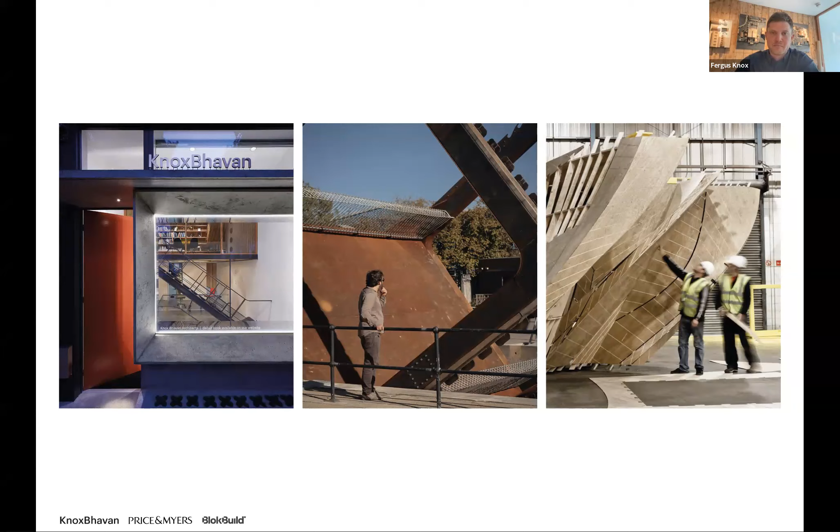So we had two items of joinery that we needed help with, and Jonathan and his team cut out the various components. These were the mezzanine on the left, which is made of plywood laminated together, which was all CNC cut, and it had a tension strap steel intersecting underneath it that Tim engineered.

And on the right is our sit-down stand-up table, which had a multiply oak top with a birch face ply chassis, which you're able to sit down and stand up at. And it all becomes one long table through the length of the office. But having worked together and knowing we could work together, we then moved on to March House.

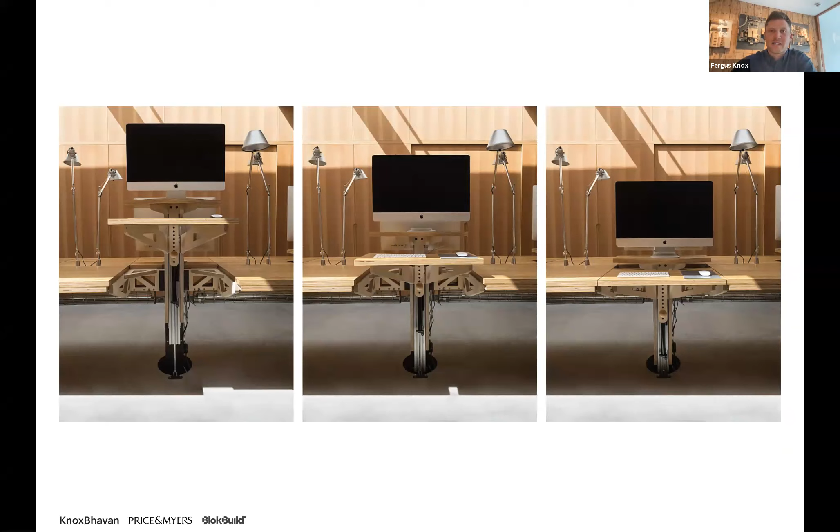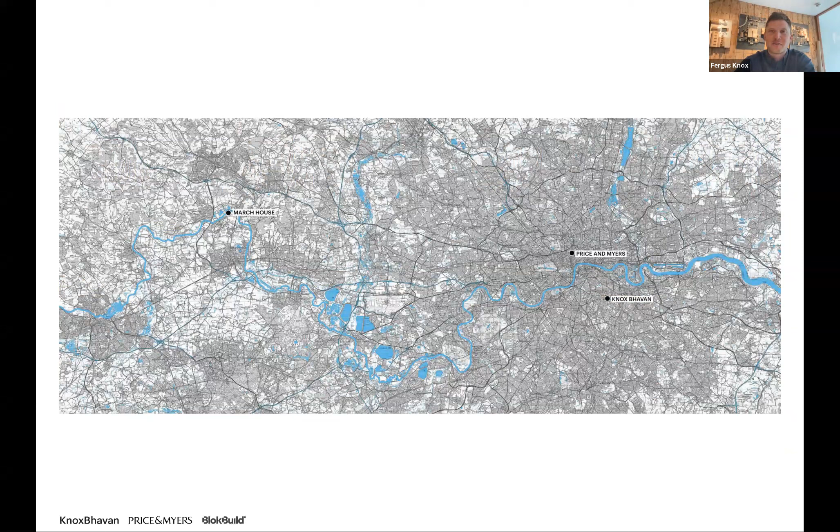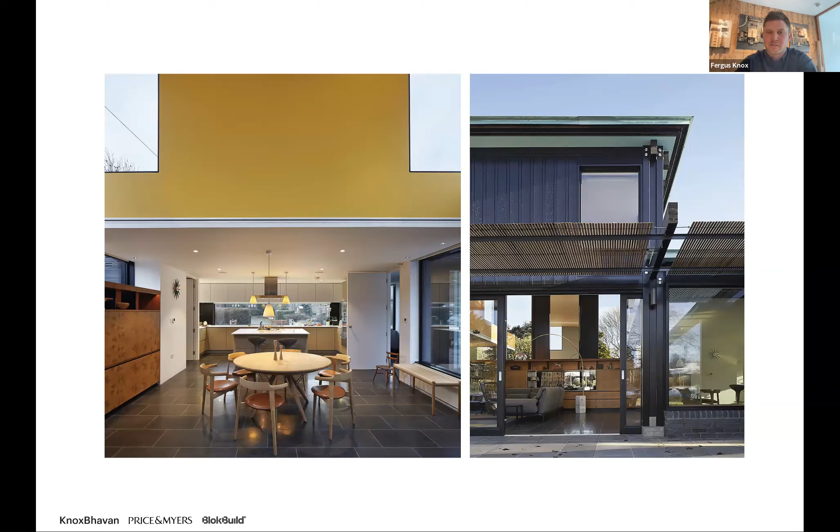So March House is on the River Thames in Cookham, to the west of London. Price & Myers and Knox Bhavan are also both in London, but Jonathan's a bit further north in Hull. Elizabeth Rose was the client, and she came to us because of a project we'd done previously in the office called Crowbrook. It has a mid-century modern feel, and that was something that she was really keen on. Elizabeth herself had an amazing collection of furniture and art, which she collated and dimensioned and gave us a really detailed specification for what she wanted in her house.

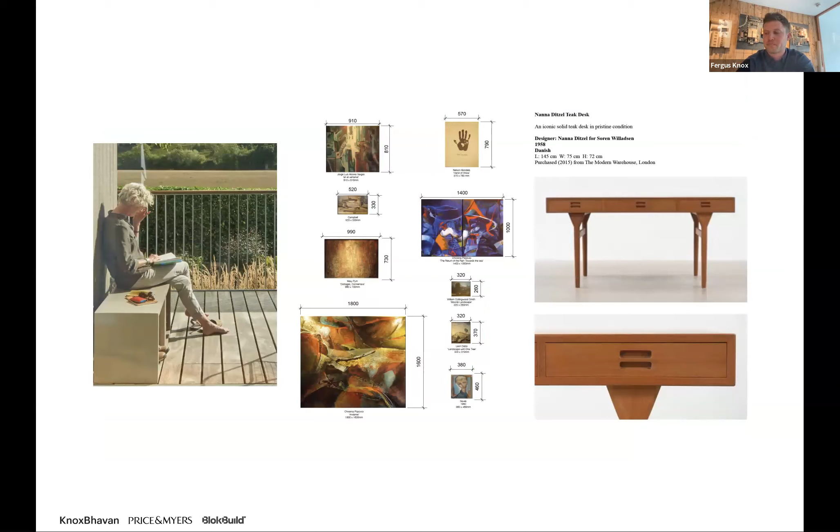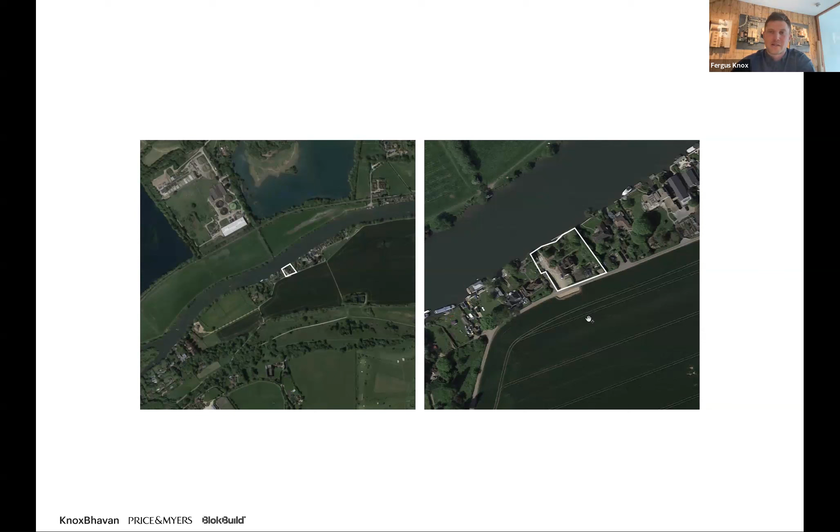She lived on the site previously for 10 years in a house which was here to the south of the River Thames. To the south of that, if you can see my mouse here, there's a hill called Winter's Hill. And then there are floodplains either side of the river. There's a sewage works, and it's close to Cookham and Marlow. The site itself here is square with an existing house in its centre, and we had to get this right of way from the local farmer to allow the vehicles to turn into site. It's a real idyllic location.

The first site visit we had when we met the client, we had dinner outside by the water, and there was a regatta going past, and it was really spectacular.

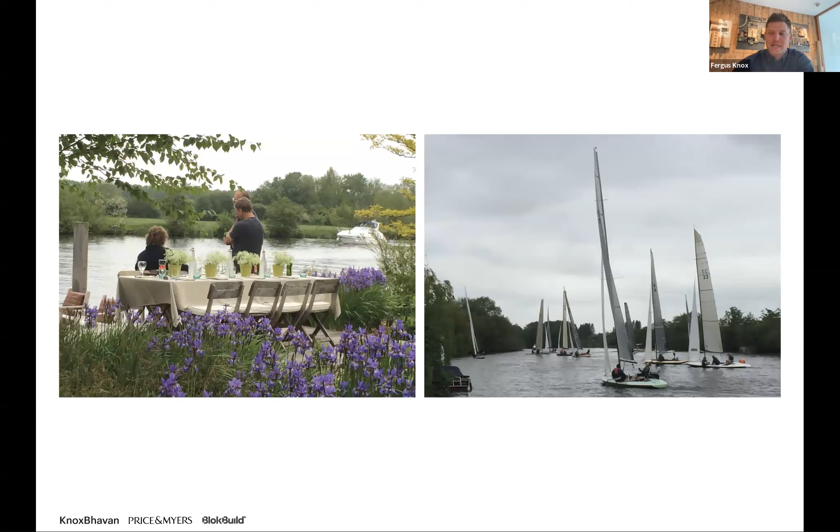But there is a real issue with the site. The flood risk is real, and it does flood, to different levels. Once a year, the ground becomes saturated to about 100 mil above ground level, but occasionally it floods much more seriously, and the client, Elizabeth, has to wear waders to access the site or use a boat.

The existing house, which Elizabeth had lived in for 10 years, was in the floodplain, so the ground floor, despite being raised, was still susceptible to flooding. On top of that, the wall construction and fabric was poorly insulated and not of good use. Elizabeth wanted a house for her family and her future needs.

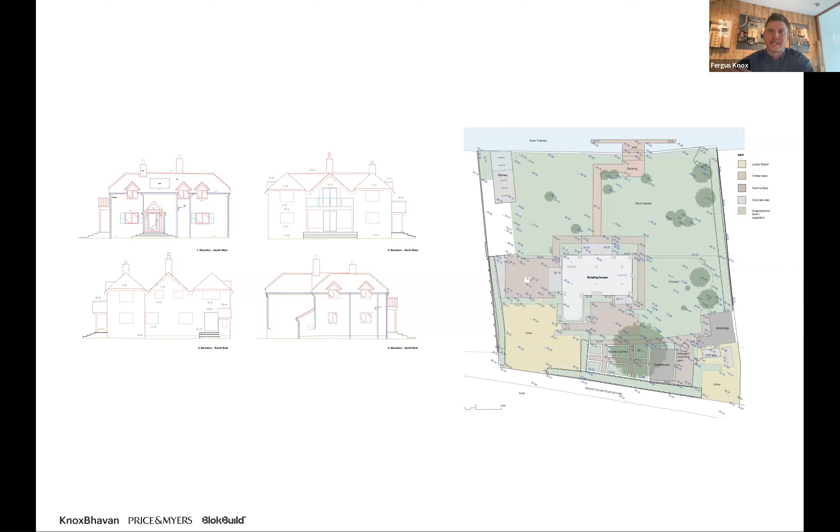And that's why she came to Knox Bhavan. She had planted her garden. Elizabeth is a fantastic gardener, and she had established on the riverside of the site an amazing garden, as well as her kitchen garden with a greenhouse, and much of the produce she grows on site, which she maintains and manages even when it's flood conditions.

So we came to the planners with a modest single-story building raised up on stilts above the flood level. You can see here, and in blue, that's the flood level line. The proposed building is 1.7 below the existing ridge height, and the bulk is far reduced, and it sits in the site very elegantly.

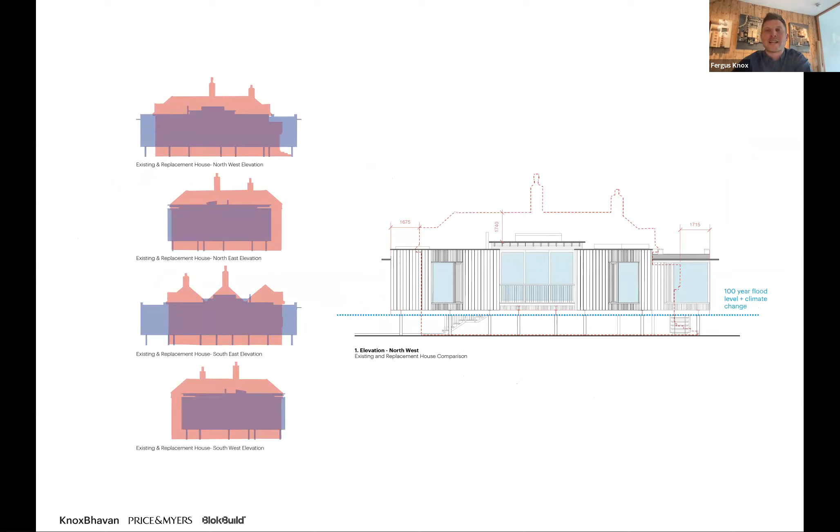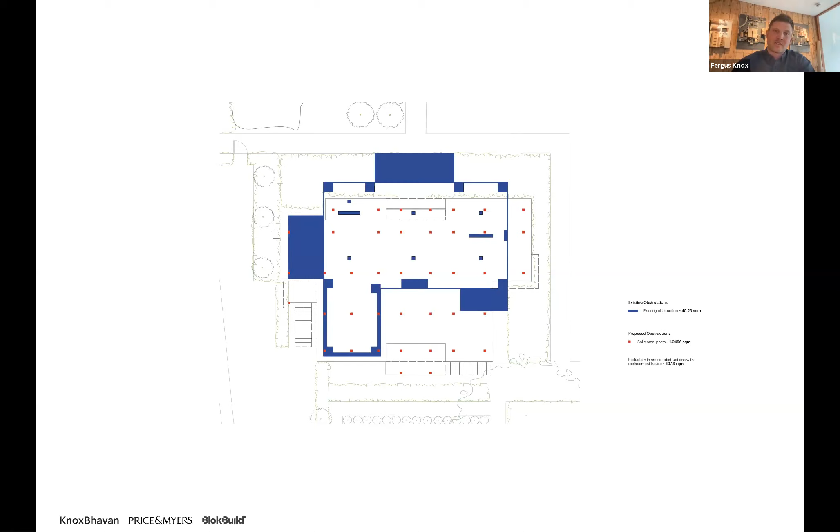But it was still a real challenge to get through planning, and it took 2 attempts, mostly because of the ground floor footprint area. We did diagrams to explain that the amount of displaced water was being reduced. Here you see the stilts actually displacing far less water than the existing building. But as a result, the plan got much tighter, and the building, I think, became better as a result.

The design had to work with the flood level. So the proposed finished floor level is the red line, the green line is the 100-year flood level, and the pink line is the flood level adapted for 35% climate change on top of that. All of the structure of the building had to be safe above that level.

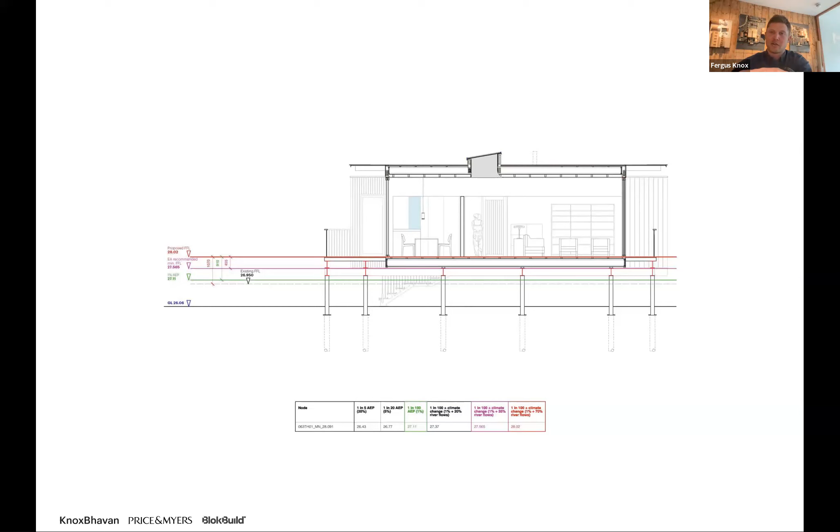The strategy for the scheme was that everything above the steel podium level, which is robust and in the water zone, is timber, and everything below that level is the kind of resilient materials. The proposed house is on the site with 2 ancillary buildings, a boathouse in purple and a new garden shed.

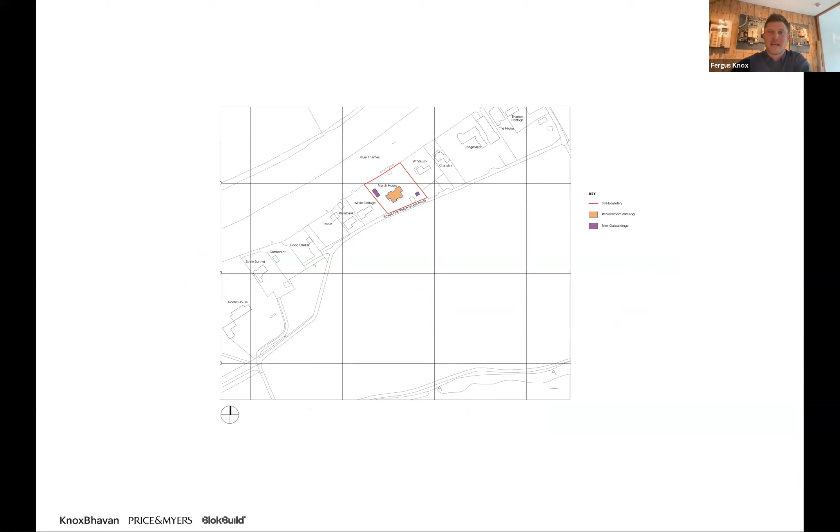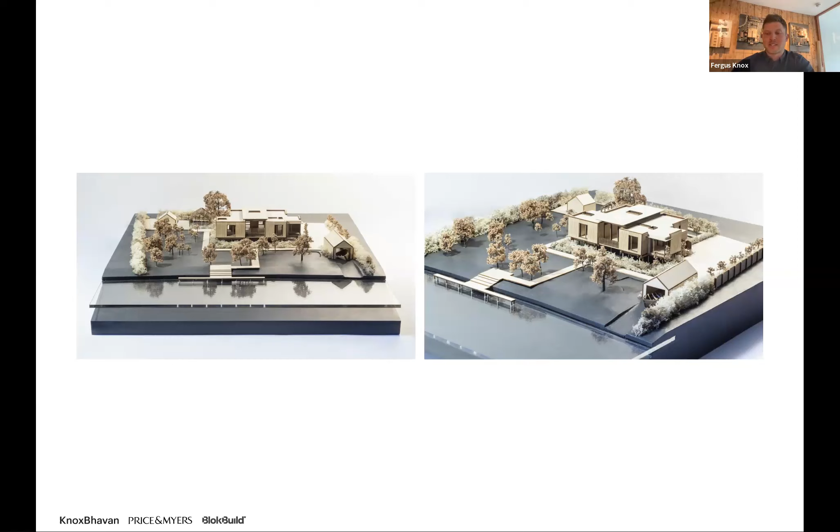Another key consideration Elizabeth had was that she wanted the house to be as sustainable as possible and well insulated, using modern methods of fabrication where applicable.

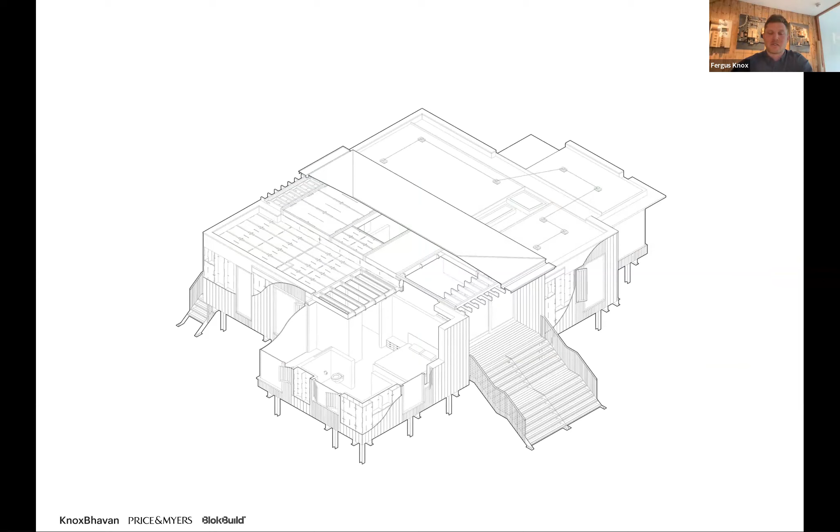The house itself uses a ground source heat pump. There's an on-site Klargester to deal with sewage, and there is also an MVHR system, which circulates air within the building, while the rest of the ventilation is done by opening shutters. I'll go into more detail about this later. High performance glazing, a green roof, and the building fabric is very highly insulated.

The materials above the steel podium level, which again we'll go into in more detail, are everything timber, to sequester as much carbon as possible and reduce its embodied carbon.

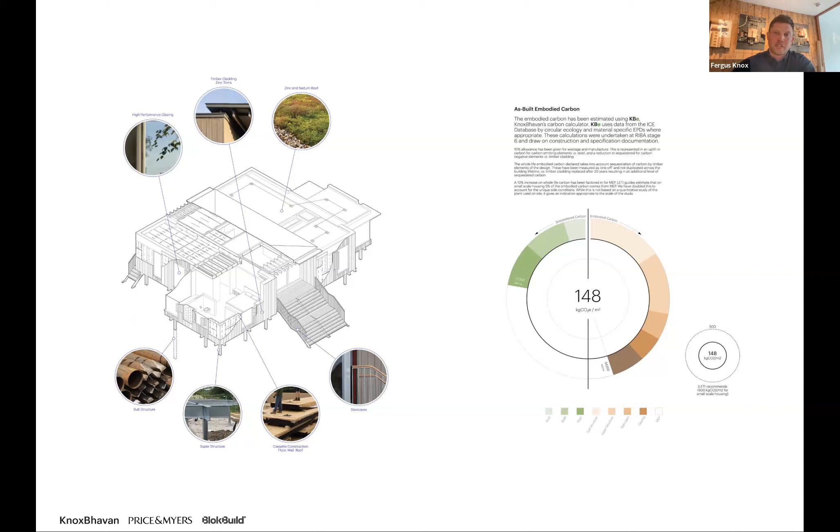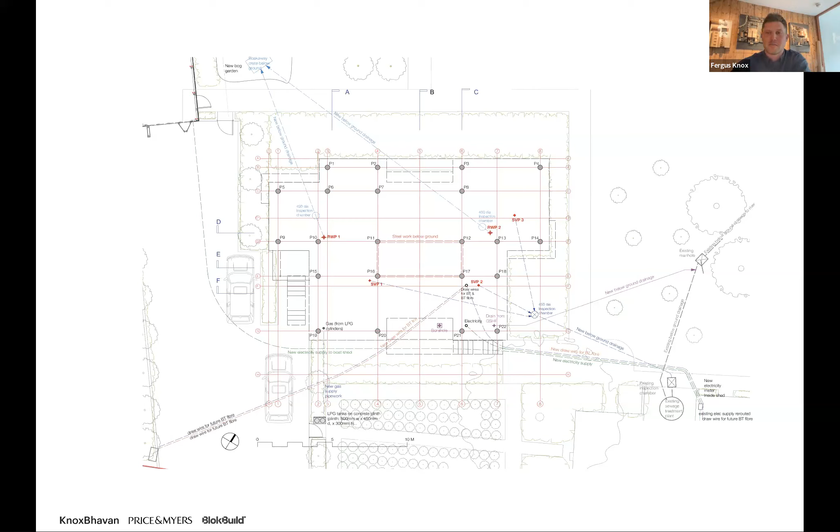So as I said before, the building is predominantly off-grid, apart from the electricity which is supplied to the road. Spade Oak Reach is a private road, so there's the electricity supply and BT. The March House doesn't have solar panels, but that's something that is going to be installed at a later date as a community supplied system where everyone chips in, a kind of collective solar panel system. Surface water drains into the Thames.

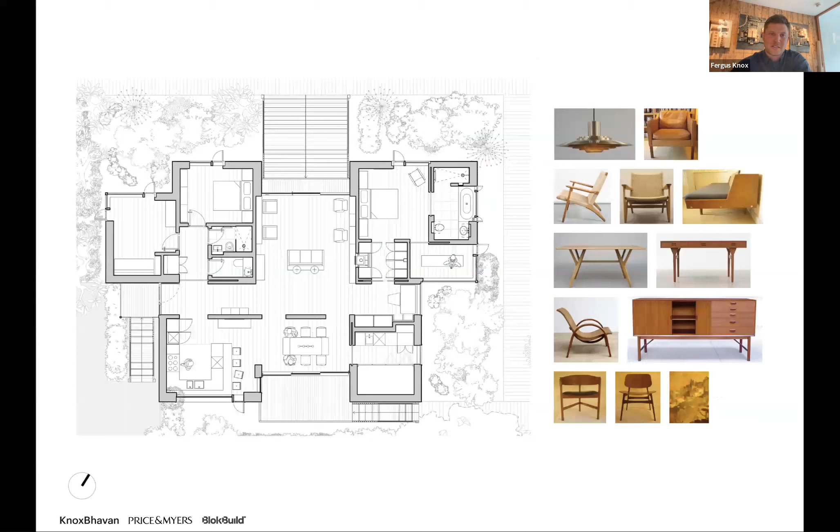So the plan is arranged around Elizabeth's extensive furniture collection, and this was a real key design factor, as well as working with her garden and the views around the building. You can see here the various bits of furniture slotted into the plan.

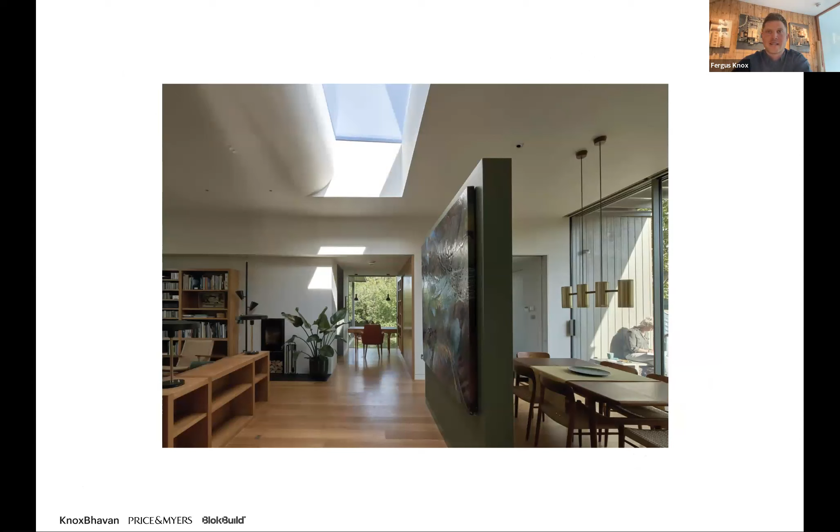So you enter the building from where you drive in, up a staircase on the left-hand side, and you're immediately greeted by a view across the whole building towards the garden, framed by Elizabeth's writing desk in front of that. The center of the plan has a spine wall which subdivides that middle space, and there's a roof light above it that floods light into the middle of the building.

After you enter, to your right is the kitchen with a view towards Winter Hill, and on your left is the guest area, but this area could also be used at a later date for a carer if required.

All of these spaces were designed about Elizabeth's furniture and her Vitsoe shelving, and these door frames were oak with veneered oak paneling between them.

The box to the north is facing the river, and that's the living space with a roof light above it. Then the dining room adjacent to the kitchen is to the south, with a terrace close nearby Elizabeth's kitchen garden, where she can come up this staircase and treat this whole space as a kind of indoor-outdoor area.

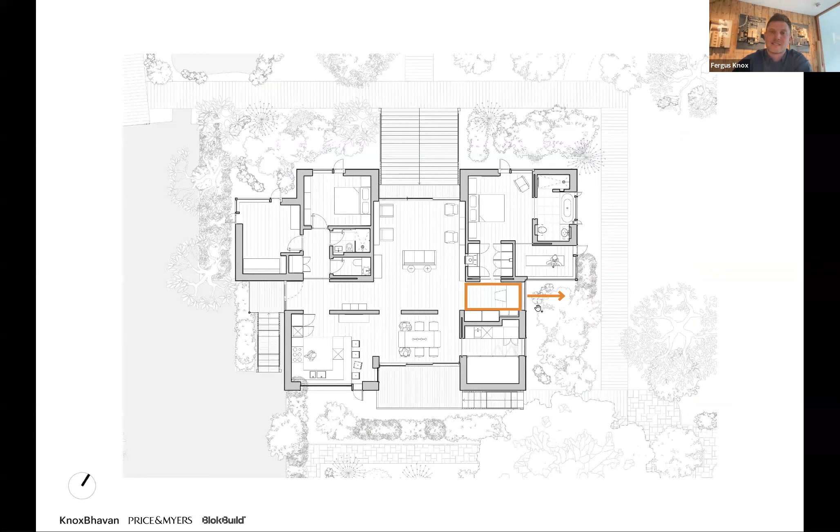So the next space is Elizabeth's study, which is maximizing any circulation space within the house. This is a desk facing a window, and to the right here is some existing joinery built into new joinery that's within the wall. You have a view towards the garden.

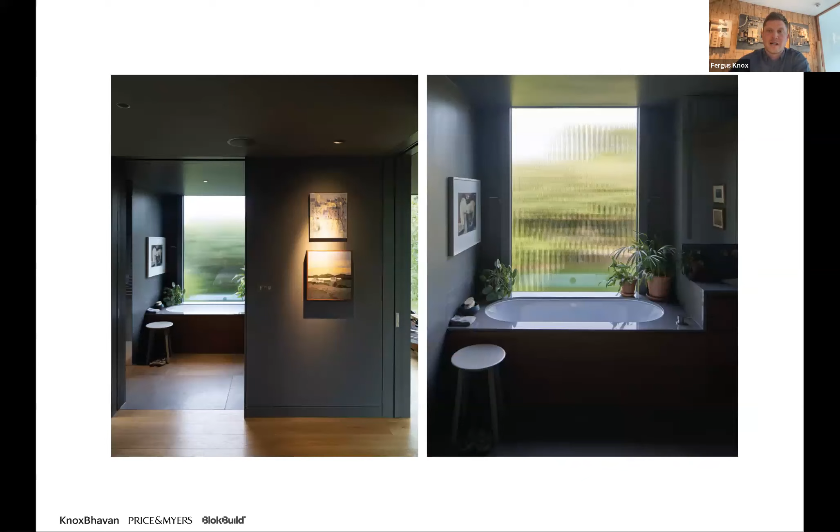Throughout the house, new joinery was built, but in her bedroom you can see in the distance that Elizabeth did have existing items of joinery that we then matched in with the new elements. So the shelving, or the drawers below her cupboards, were an existing teak unit that was then matched by the joiner with new doors above, likewise in the kitchen.

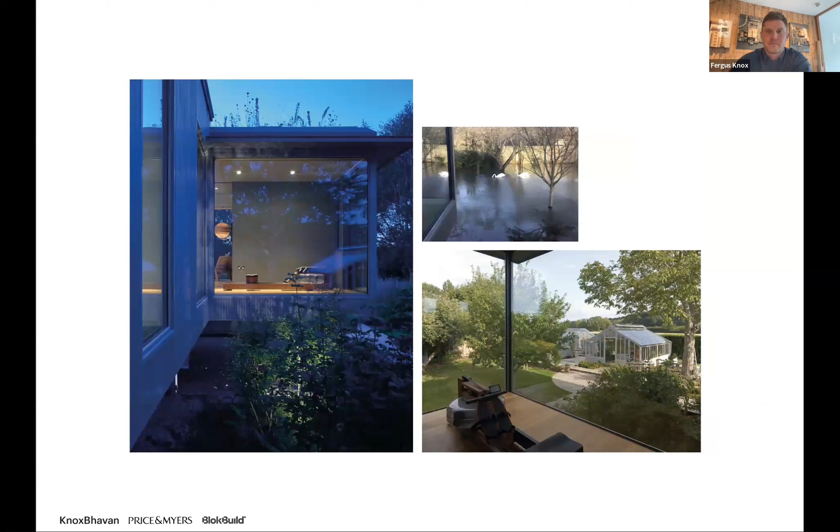And there's oak floors throughout the building. This is the yoga studio and her greenhouse beyond. So there are three main routes of access from the building.

And as I explained before, there's the staircase towards Elizabeth's kitchen garden. All of these staircases were carefully manufactured in steel to be resilient from the floodwaters, but we used Balau treads and Balau handrails, which is a tropical hardwood, very resilient if and when it gets wet.

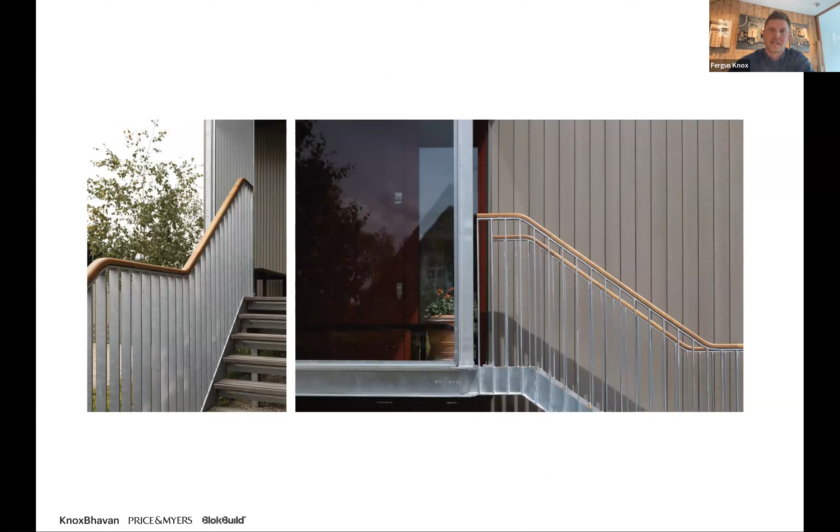Elizabeth was very keen on that handrail to be in timber, so it's soft to the touch and warm, and not cold as the steel.

These show some of the details of how we spaced that timber off the steelwork to give a shadow gap and to allow it to be ventilated. We did the same detail with the treads where they're sitting above the steel substructure.

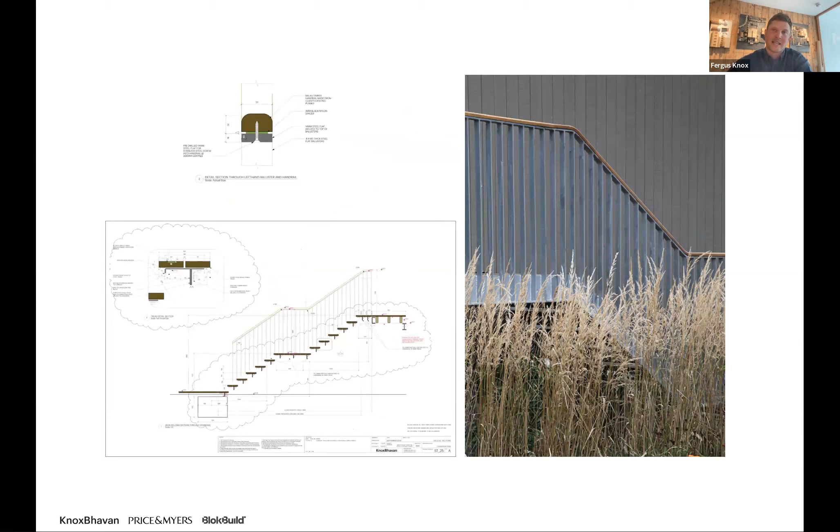So then moving on to the cladding of the building, the building is clad in larch with a coating called Centrin Chroma Coat, which was grey in appearance, and Elizabeth was keen on that to contrast with the existing silver birch trees.

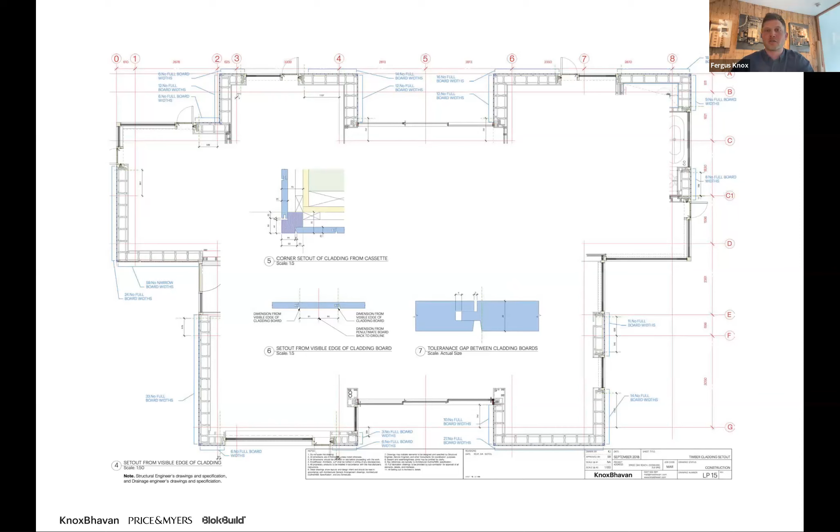There were timber corner posts, and we had larger sawn boards between the windows, and then we used narrower planed boards beneath the windows, which gave a really nice contrast between the two different areas of the elevation. The windows were custom built in Iroko timber with an Osmo stain.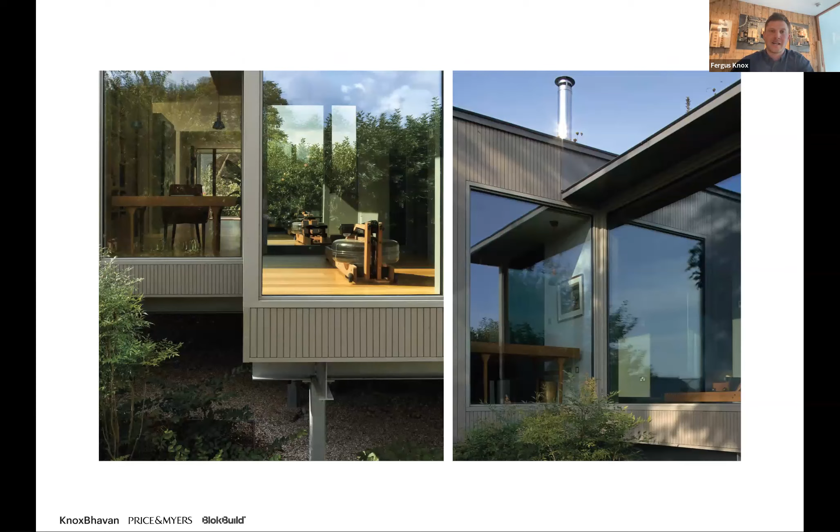You can see here on the elevation, you have the solid ventilation panel, and the floor to ceiling flush glass opening, which is lost within the ceiling and floor, with a blind box integrated into it.

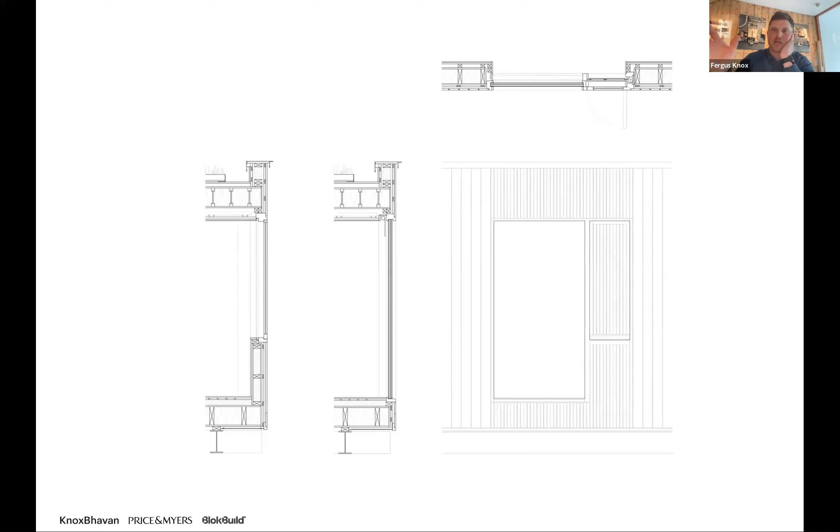On the outside, you have the plain boards and the wide boards, and the plain boards gave a bit of tolerance for the contractor to get that boarding working nicely, which you can see in these images here. On the left, you see the integrated bat box as well, which is just a slot in the cladding to allow them to roost.

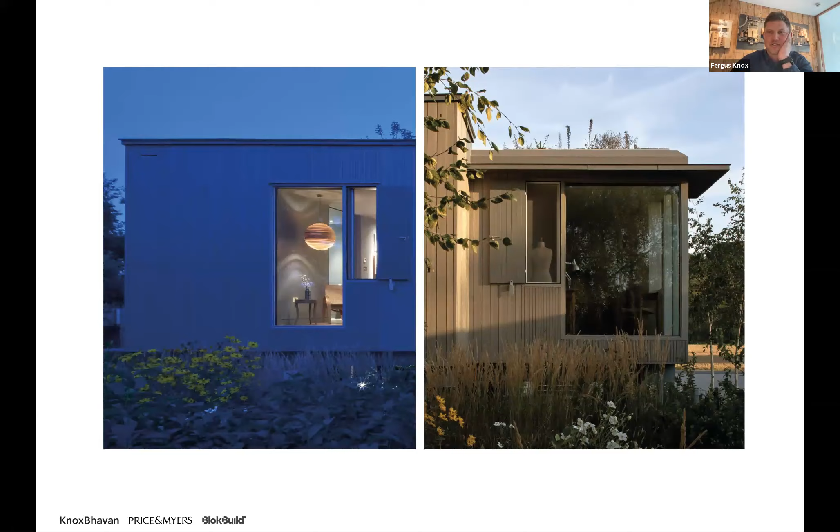So in more detail, the windows, which were custom, had the solid panel but then the hinged opening door. The hinge was on a concealed hinge with door hardware.

We sourced a roller blind fly mesh, which we then integrated into the window joinery. We also installed these shutter dogs, which are window stays effectively, with a kind of tiller rudder to stop the shutters moving in the wind.

The fly screens, because it's next to the river, are really important and they work really nicely. They're also magnetically fixed, so if it ever was to go wrong, you have access and can repair it.

What's really nice about having the solid panel fixed window and the opening solid panel is that you get this real flush finish for the windows. It looks like you're in the tree canopy, being raised about 1.8 meters above the ground.

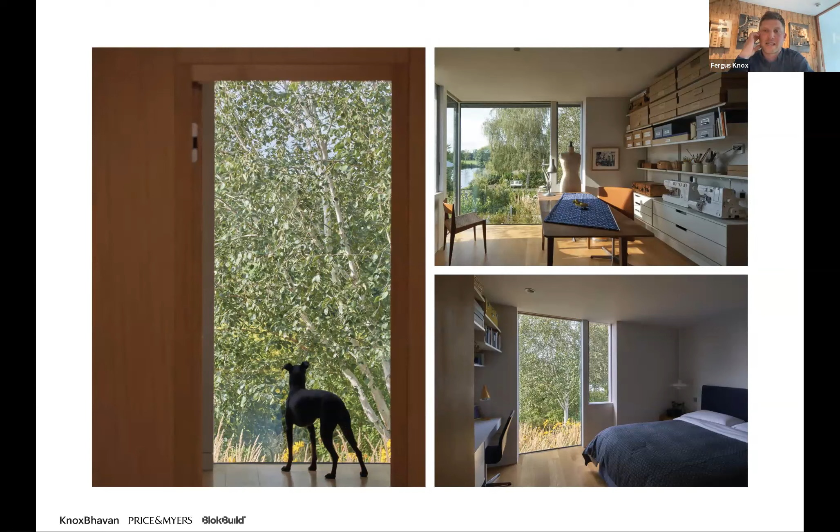There was one window - most of the windows have an overhang, but there was one window facing south, that big window in the kitchen facing Winter Hill.

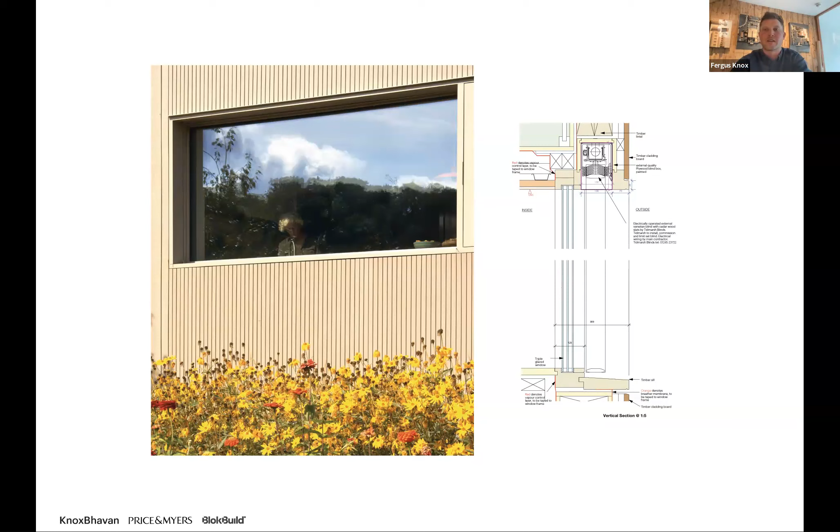For that window, we integrated an external electronic blind from Tidmarsh Blinds, which you can mechanically operate, tilting the angle of each of the louvers. That works really nicely, and it's the only place where the sun really does get into the building, and Elizabeth uses it all the time.

There are two additional buildings, which I mentioned before. There's the garden shed with the bird cage on the back to prevent birds eating some fruit trees, and the boathouse - both made of resilient materials, corrugated galvanized sheets and galvanized steel frame.

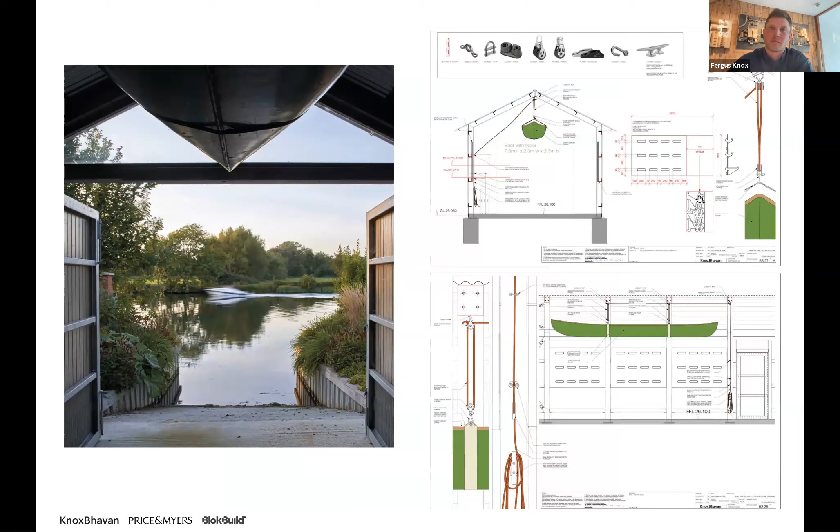The boathouse has Elizabeth's canoe slung in the top, and it has plywood panels with slotted hooks which allow Elizabeth to hang her bits of garden furniture and chairs on the wall, as well as other things.

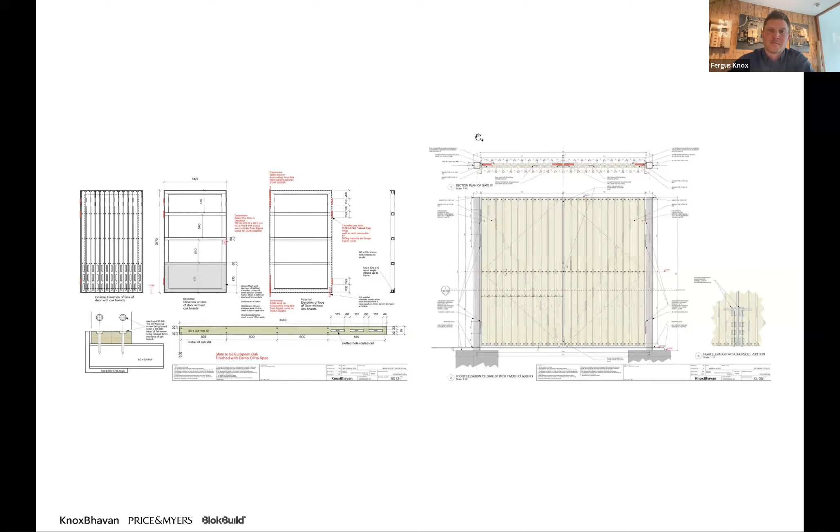The doors and the garden fences are clad in oak, a robust material, but also slotted on the boathouse and the shed to allow water to pass through. They have an Osmo finish on those as well. This is the bird cage on the garden shed, and on the left is the boathouse.

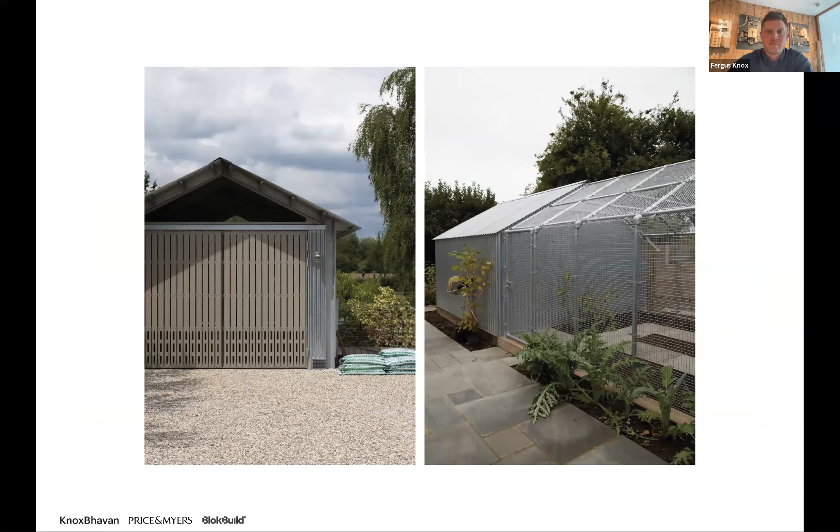Flooding was a real issue that we actually had to think of, not only for the final building, but also during the construction process - how we could minimize the amount of material stored on site, and how we could assemble the building as quickly and efficiently as possible, minimizing wet trades and other elements.

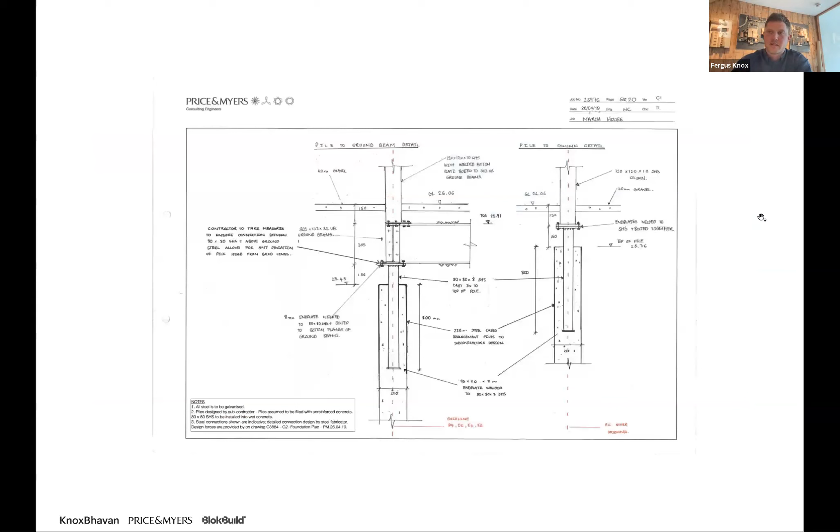Analysis - yeah, this is one of our drawings, customized drawings, showing how we started. So as Fergus said, it's largely a timber structure for the building, but it starts on the ground, obviously, with some driven steel piles.

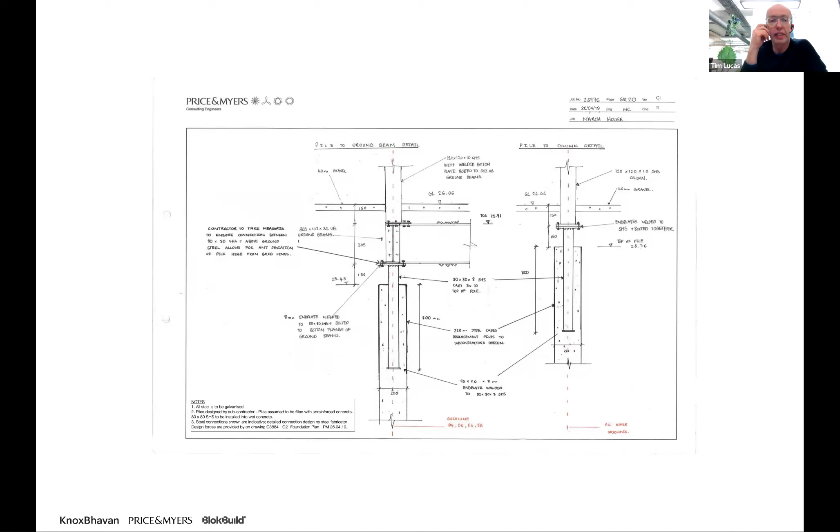Those are hollow steel tubes, 250 millimeters wide, driven down about 16 meters through the alluvium into the underlying strata. You can see here they were filled with concrete, and then this mini plunge column was installed on that, which allowed us to get ever tighter tolerances in the setting out of the steelwork, because obviously the timber above is highly precise, while the steel is within normal steel tolerances.

So you actually see the edge of the steelwork as the profile of the I-beam, and you can see in the middle there's a ground beam, rectangular ground beam foundation. So effectively, we have a Vierendeel frame that forms the structure of the building with no cross bracing to get in the way of the floodwater. So the idea is to leave the floodwater and any debris as unimpeded as possible underneath the building.

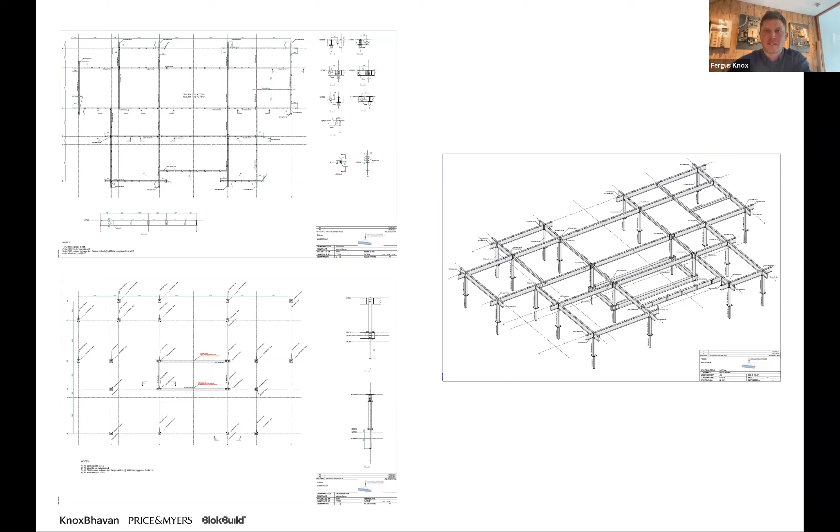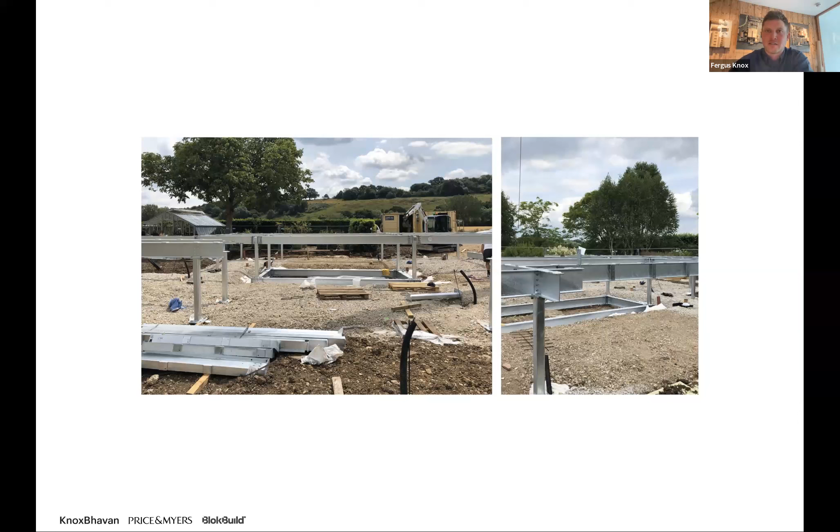Where we connected the steel onto the timber, we put these steel plates to space off the timber from the steelwork so, if it ever did get wet, it's ventilated in that zone. Yeah, so there's softwood joists on their side on top of the timber, so it's a 100 mil wide flange. And then, as Fergus says, it's bolted off, and that allows us to move from the steelwork into the timber by bolting the timber on top of the top flange.

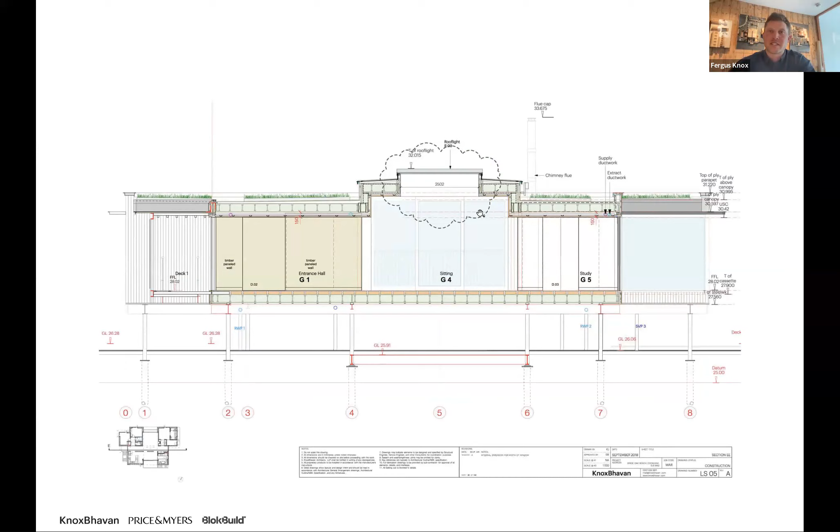Sorry, Tim. The actual timber box on top of the steelwork is incredibly simple. It is just this insulated box that sits above that and wraps in a continuous layer all the way around the building. And then Tim, you can show the... Yeah, here's the detail of the interface between the steel table and effectively the floor slab of the building, which is prefabricated in timber as a large cassette.

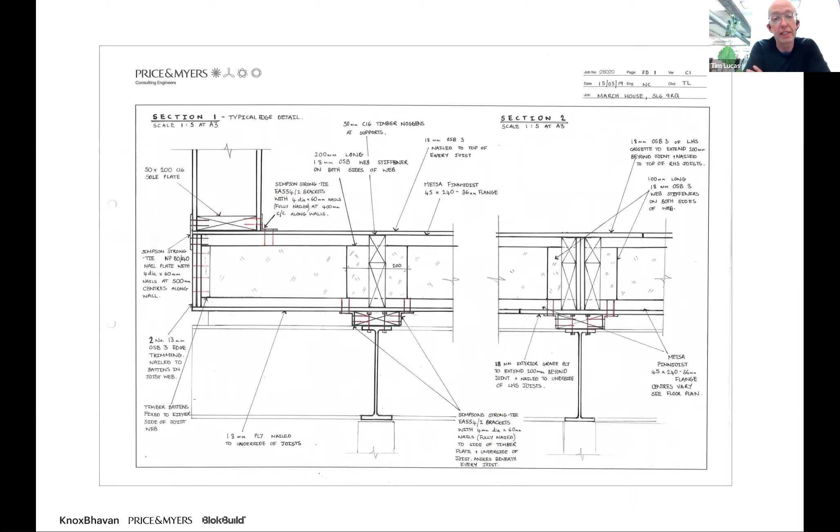So they have Finnjoists which span the full distance. They're about 6 or 7 meters long. They were quite large, with a plywood soffit panel and an OSB top base. That is filled with insulation, and it has softwood noggins as well, and that forms effectively a large timber table. And then on the left you can see the bottom of the BlokBuild panel, which is a hollow OSB box. What we've been doing recently, and this is one of the earlier projects where we started, was helping BlokBuild develop their system to be based entirely on OSB, so with no timber sections in the cassette.

This is a typical cassette. Jonathan might want to come in and explain what it is. Yeah, so we digitally manufacture these using CNC machines. So OSB sheet material with the tops and bottoms and the side plates all screwed together, and you can see that central cutout has got a fin. They're all individually referenced in terms of installation sequence, and then they're assembled. With the tops off, we fill them with insulation, then screw them shut.

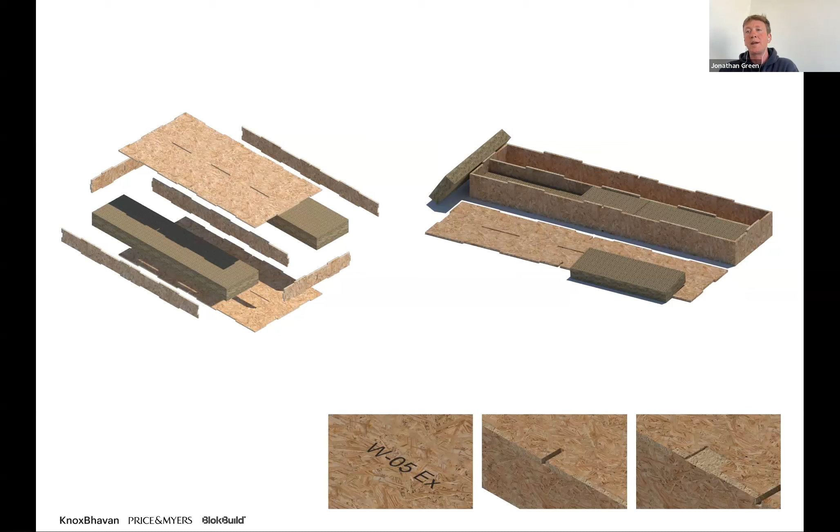We've got a peg detail, which is to fix one cassette to the next cassette, and then a routed nail plate position. And those nail plates are, I think, a galvanized plate that you fix on. Through this project, the nail plates weren't rebated at the time, so that had a few issues with the external battening, just in terms of having to pack it. So the iterative design has meant that we now rebate those plates, and that helps with the quality management processes as well. So we know that we've got all the nail plates that we need, and they're all in the rebated positions.

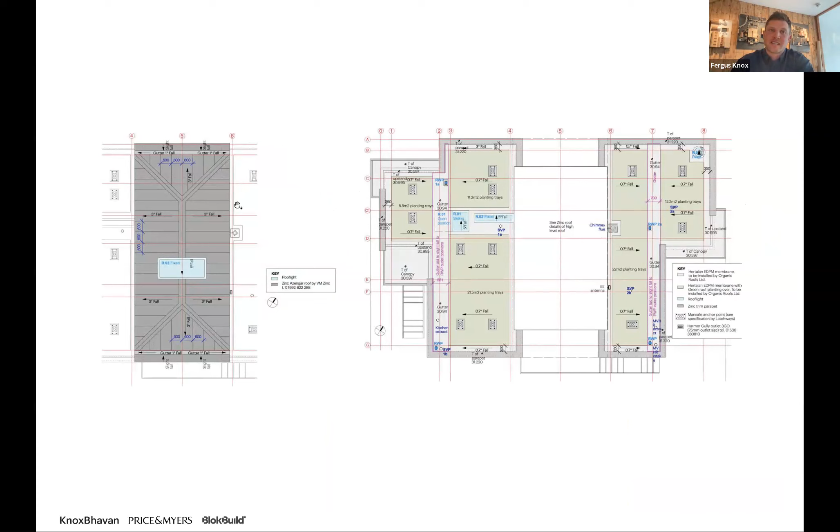So when we started designing the building, we hadn't actually decided that we were going to use Jonathan's system, and we were keeping our options open. And as the building had a flat roof, water ingress was a concern. So the two sides of the building, which are planted green roofs, were laid on a fall, but they were fully ventilated with the zinc central roof in the middle.

And you can see here that continuous ventilated layer underneath that top surface with a liquid applied membrane with the green roofing above and the zinc roof in the center. There's the green zone, which kind of ended up being Jonathan's system. And then below that is a clear void for the MVHR ductwork and servicing, and then the finished plywood layer

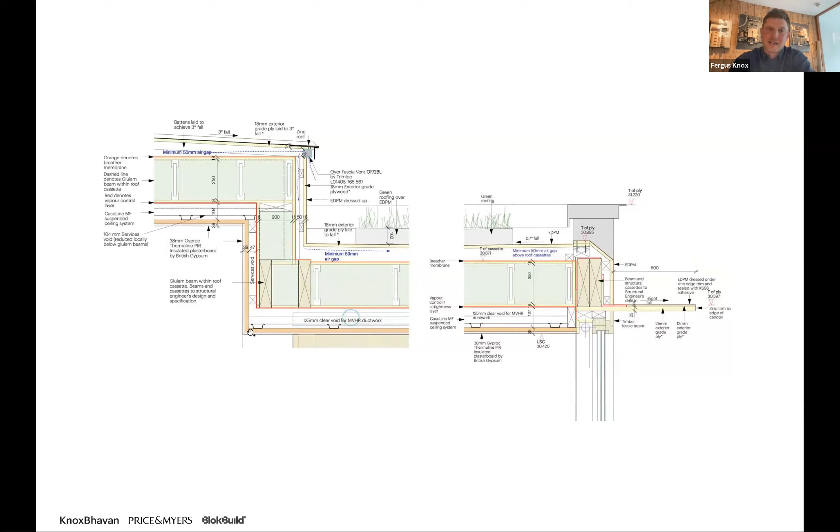underneath. And you can see where it works really nicely with this building, how you have that continuous insulation layer with the ventilated zone around the outside between the external roof finish and the cladding finish. And that also allowed us to vary the internal finishes from the bathroom to the kitchen to other areas. And we use sand above the cassette to dissipate the heat and allow for the underfloor heating.

Yes, this is one of our sketches showing the ties and layout of the floor cassettes. So they're generally done in two spans, so from where the mouse is, all the way north-south on the drawing, and then placed east-west, about the width of a lorry bed, so about 2.5 meters wide.

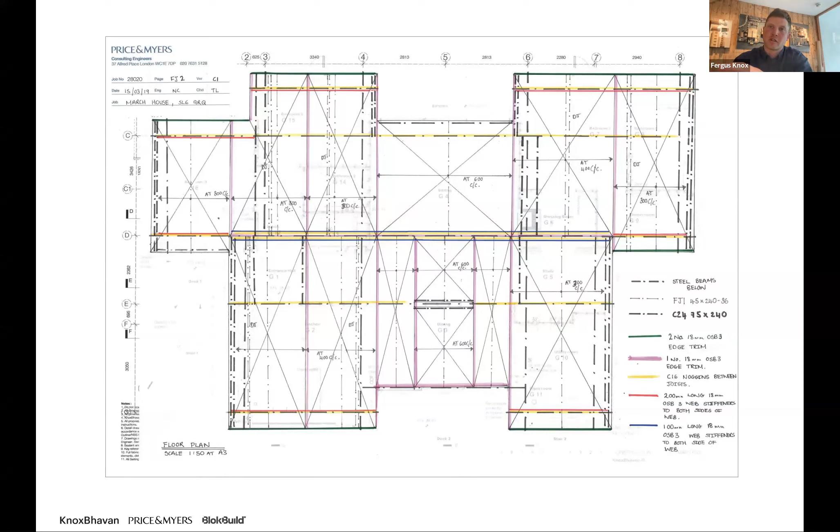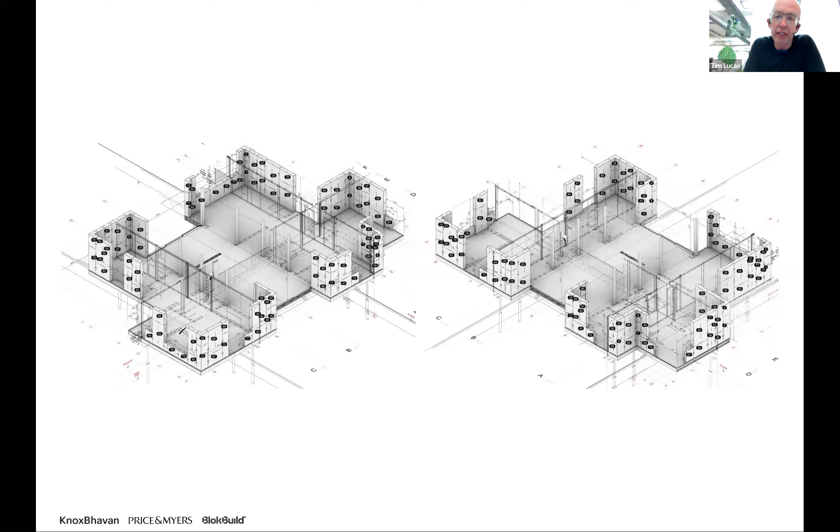I was just going to say for the house, the strategy was that the floor and roof cassettes were made by Jonathan, but not loyal to Jonathan's system. They were much larger, but the wall cassettes would use Jonathan's nested computer cut. Yeah, so perhaps Jonathan can talk us through the design process with these, but obviously they're staggered in 2 layers because a sheet of plywood's only 2.4 meters high. Yeah, but then the larger panels.

This shows the floor panels that we were making up, and these were made using the FJI joists and softwood noggins and then insulated. But we've got a limited size in the factory, and we don't have the butterfly tables that larger manufacturing facilities have, which is why we predominantly use 600 by 1200 cassette sizes.

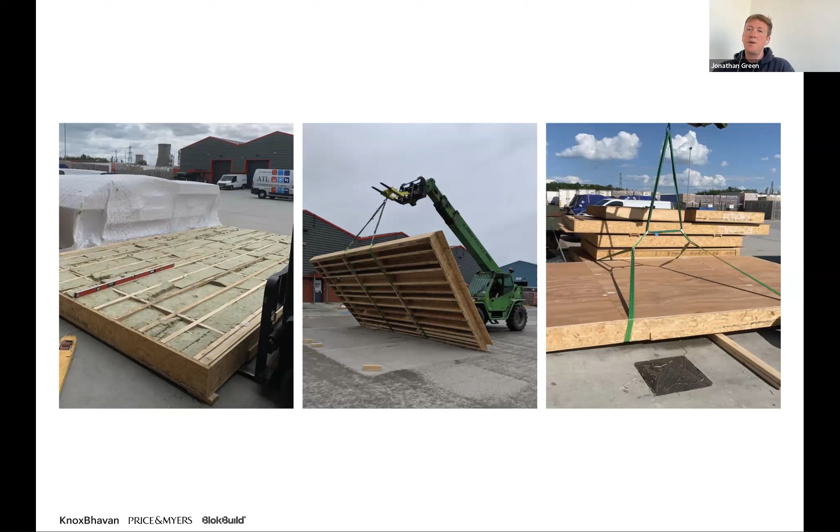So we made these larger floor cassettes, and I think through the process of making them for the floor, we went back to Price & Myers, Tim's team, and reduced the size of the roof cassettes. The wall cassettes were going to be our standard, and it was based around access. You can see there the floor cassettes arriving, not much room to get those down. And then the wall cassettes are much more manhandleable, so 1200 by 600 maximum size.

You can see these being craned into position off the lorry, which is a really quick way of doing it, already wrapped in the membrane. The membrane was factory applied, taped at the sides, and then as we were installing them onto the steel, we used tape to tape the joints, just making sure all of that was in place and hadn't been damaged.

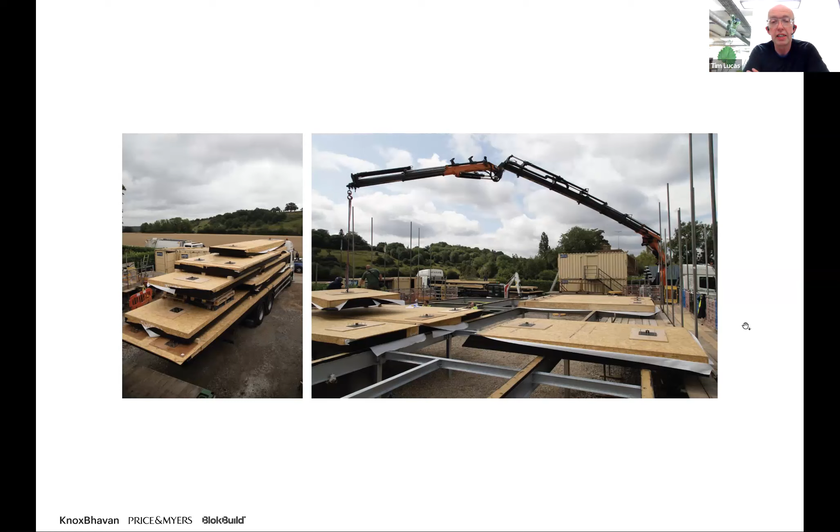I think what you can also see in this image is the timber sole plate, which the cassettes were then connected onto. And also the lifting plates, which were screwed into the top of the FJI joists to allow us to lift them up and place them directly side by side. Yeah, there's the straps on the lifting plates.

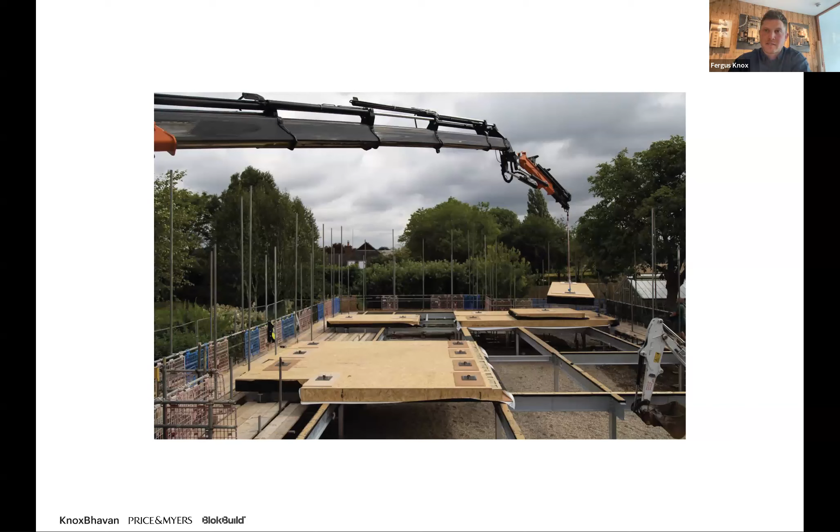And there was a connection panel left off to allow you to screw and bolt each of these individual panels together. And then that was installed once everything was positioned on site. And the top skin was left over long, as I remember, and as it came down, it connected with that connection plate that had been left off and then fixed through.

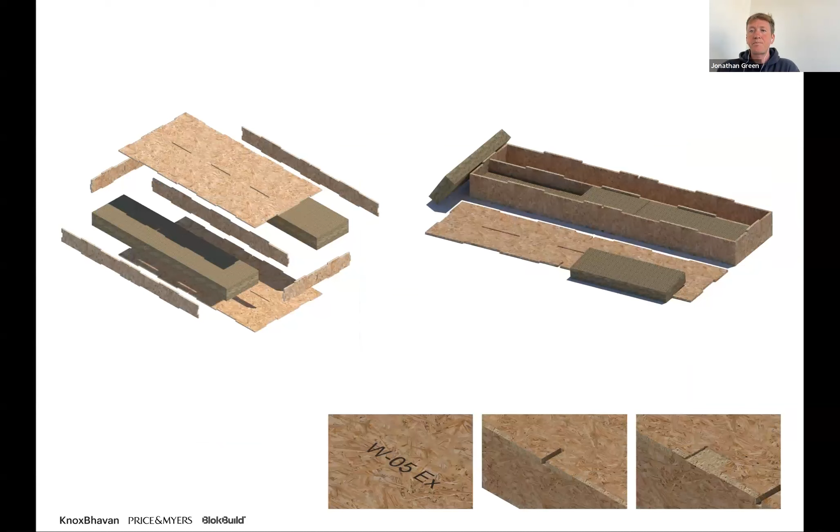And you've spoken about that, but the ground slab cassettes weren't, as we said before, traditionally Jonathan's system. But for the actual digital cassette, there's a design process where we have the architectural designs and 3D BIM model, which is then sent as a coordination fabrication model to Jonathan and his team, and also Price & Myers.

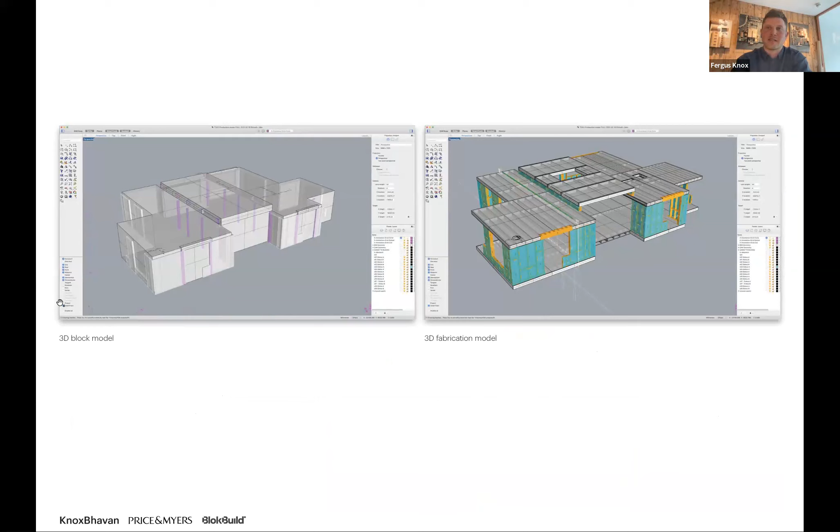And then this is just frozen. Sorry, here. And there's a crude block model, which is then to be inhabited with the cassettes and the script. So on the left, you see the zones, and then on the right, you have the fabrication model.

Yeah, so we go through a process of defining the structural layout of all of the OSB cassettes, and then that markup effectively is done in 3D on the Rhino model. And then the actual fabrication model is run through another script that produces all the parts, which, as you can see on the right-hand image, feeds information to the CNC cutter.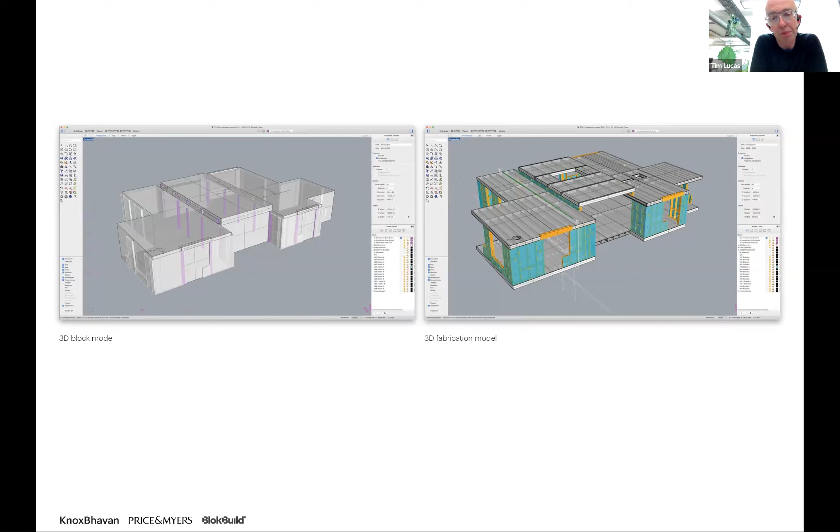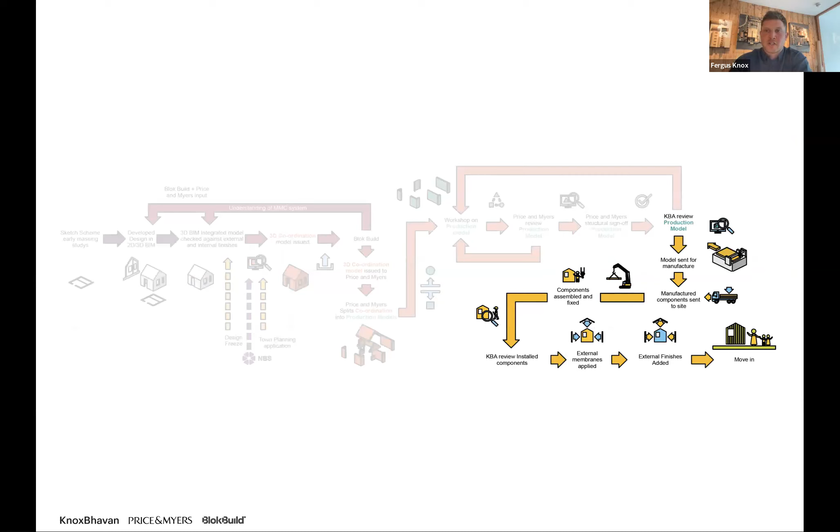So the structural openings are checked, the position of various cassettes, to also double check against services and openings. And then finally, once Jonathan's given the production model, it's reviewed by us and given the okay, it's then put into manufacture.

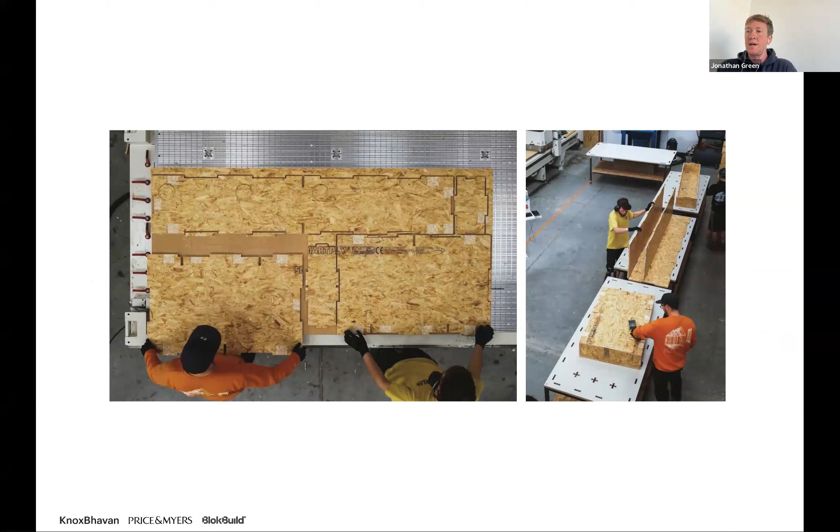You can see the way that we do it. So we machine it on a flatbed CNC, 3-axis, and then it's assembled using those parts that are cut out. There's very minimal waste. A sheet produces 50% of a cassette, so 2 sheets is a full cassette. And yeah, they go together pretty quickly on site using nail plates and pegs.

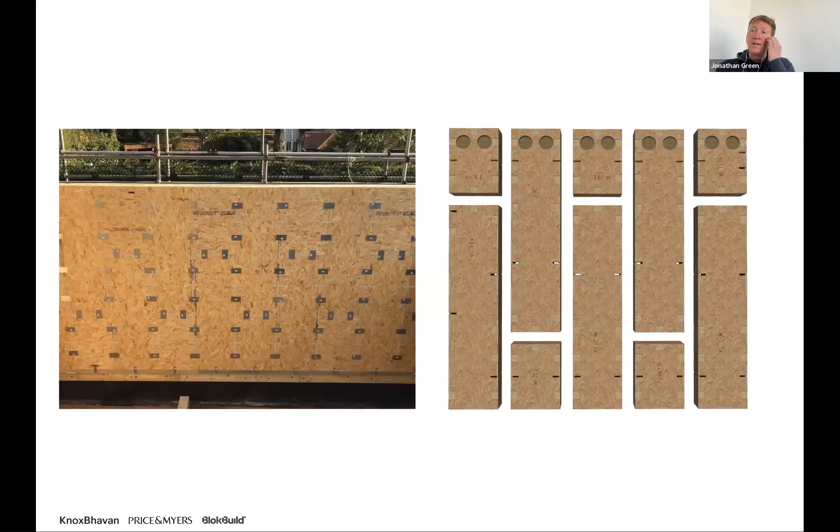So the pegs are a plywood peg that they just knock in using a mallet, and then the nail plates are rebated or routed out on the joint lines of the position that they need to be in. They actually weren't on this project, so as part of the design process, we've now started routing those out.

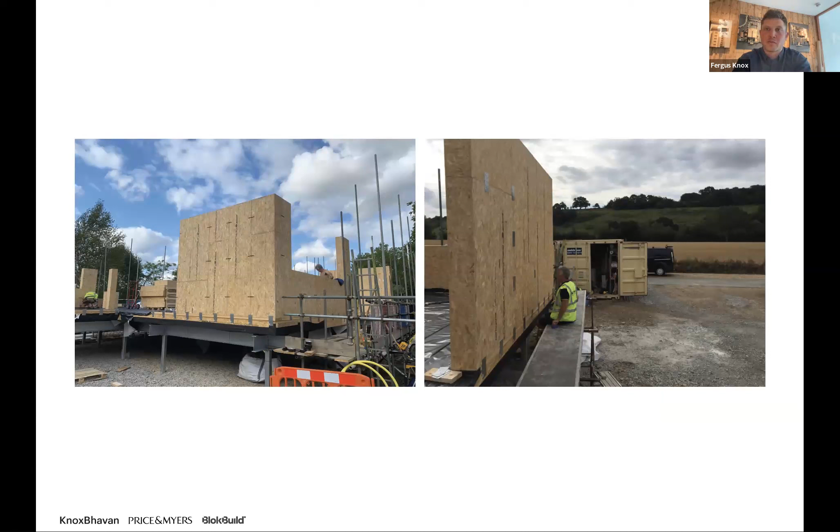Similarly, with the floor cassettes and the roof cassettes, on this project they were built using fin joists and noggins. We've now designed that to be a digitally fabricated cassette similar to the wall cassettes using bolted connections. So that has also become a lot smaller and more precise in manufacture. I think that was really interesting on this project, all along learning at the various stages how the system could be improved and what the contractor Philium were finding difficult on site.

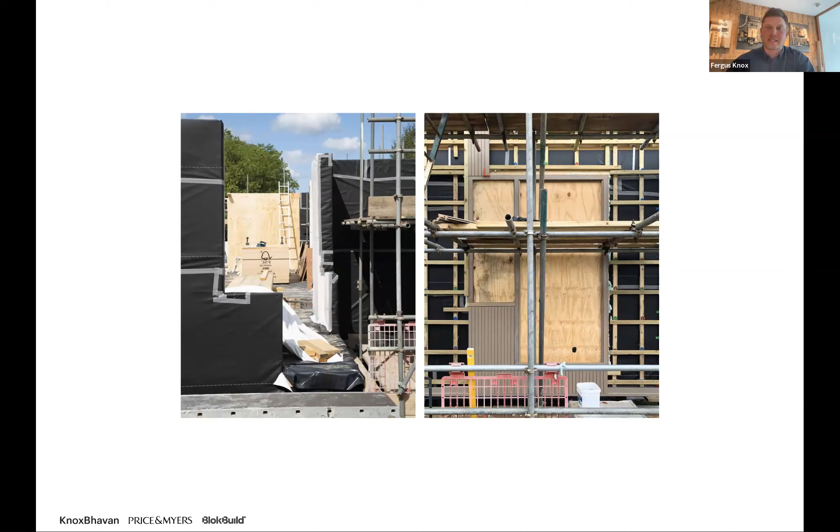So once the membranes were all installed over those nail plates, you couldn't actually see the 3 mil thick plate, which then made the second fix and the battening and the cladding that much more difficult. And that feedback and response enabled Jonathan to improve the system and use these nail plates now as a coordination to make sure the cassette is the right way around in the right position as well, don't you, Jonathan?

Yeah, coordination, but also quality control, because before we were relying on the contractor to install the nail plates as per drawing. So now we do a check as we go along, and as long as all those rebates are filled to a certain screw pattern, we're happy with that.

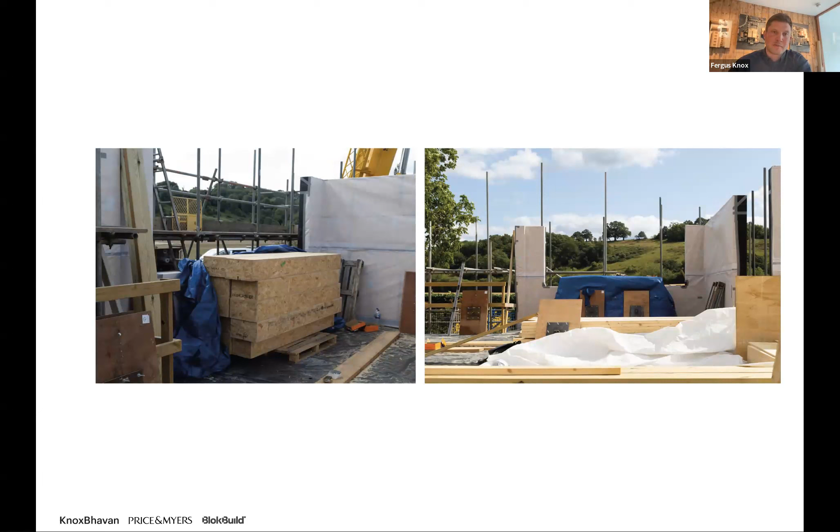And once the wall cassettes arrive on site, they go together very quickly. And you can see here on the right, the views are starting to be framed. That's the view from the kitchen towards Winters Hill. And the white membrane, the vapor barrier internally, and the black one, which was Novia, I think, Jonathan, on the exterior, the breather membrane. And you can see there stacked up some additional cassettes ready to be installed and put in position.

And we use the cassettes as lintels as well, so there aren't any steel lintels or glulams. It's a cassette with a number of fins internally notched through the front and back skin that create the lintels. One thing we did on this project was most of the external walls and a few primary walls were in the cassettes, but most of the internal walls were actually built in situ as stud work to allow services to run through.

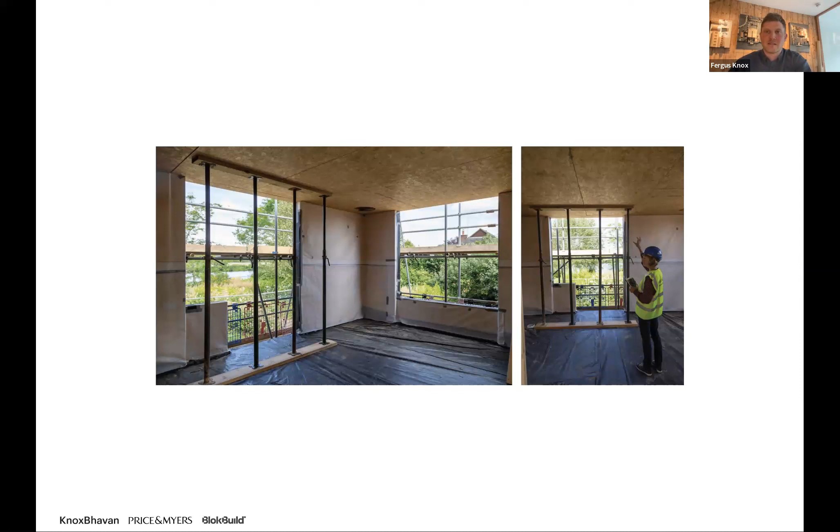I think what we learned from this is, in terms of sequencing and buildability, it would have been better to have more BlokBuild cassettes as the primary structural walls while the building was going together. But obviously there are certain locations where on-site stud walls are more necessary. It's more convenient. Yeah. So this is the building once the cassette walls are in place, and then the roof starts to go on.

Again, these are modular cassettes, which now differ a bit. These have pin joists inside them, and the system now is fully stress skin, top and bottom section. We actually reduced the size of the roof as well, because the learning we had from the floor cassettes was that they were too big for transport, but also for handling in the factory. So as we've designed them into being CNC cassettes, they're now a maximum width of 600, so much more handleable on site.

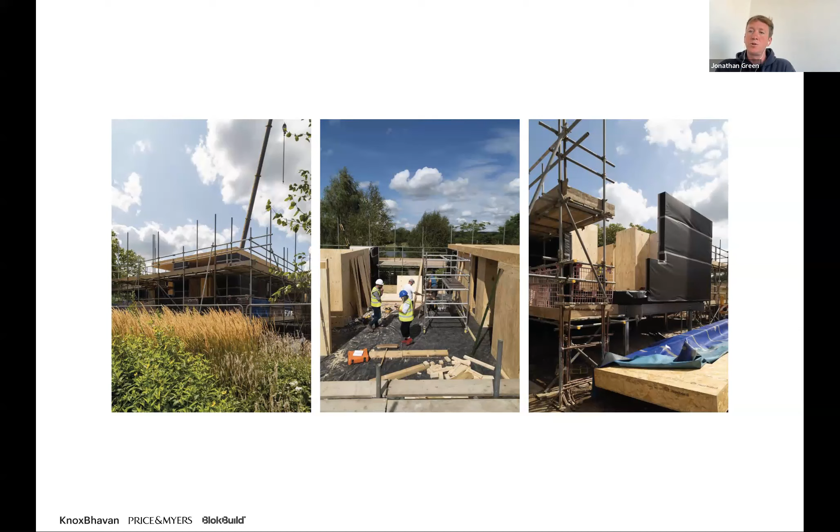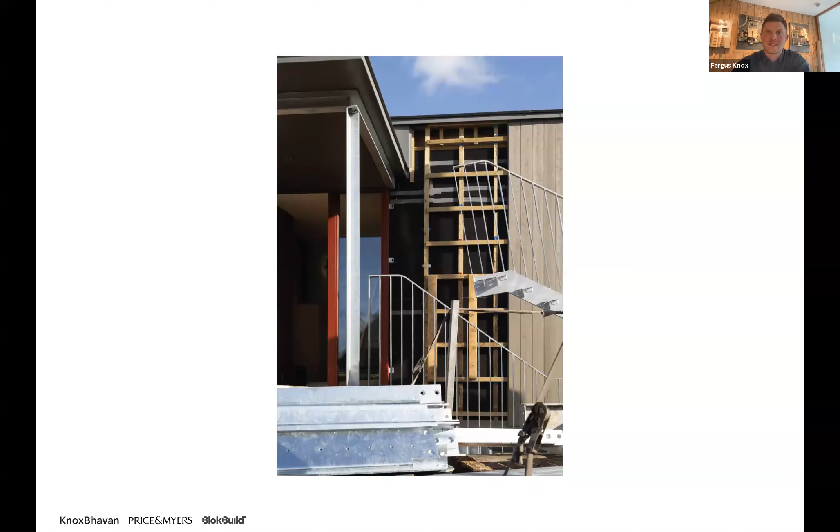And then once all the membranes were installed and the walls in position, it was then the final fixes of the cross battening for the cladding. The zinc roof was then prepped and installed. The roof membrane was placed, windows put in, and then finally the galvanized steel staircases and terraces were put in. And then the final house, which was, as we said before, all timber above the floodplain, and then steel and other resilient timbers below that level.

And the house does flood. This was a photo Elizabeth took recently after construction, with swans swimming underneath the building.

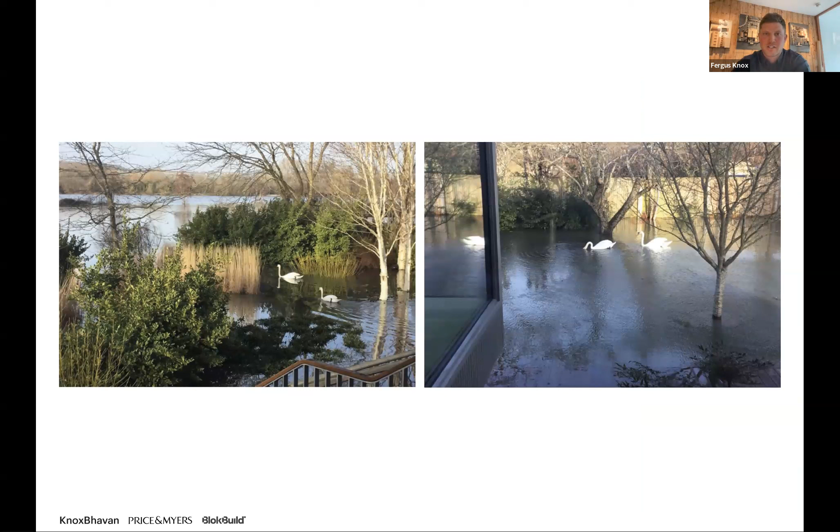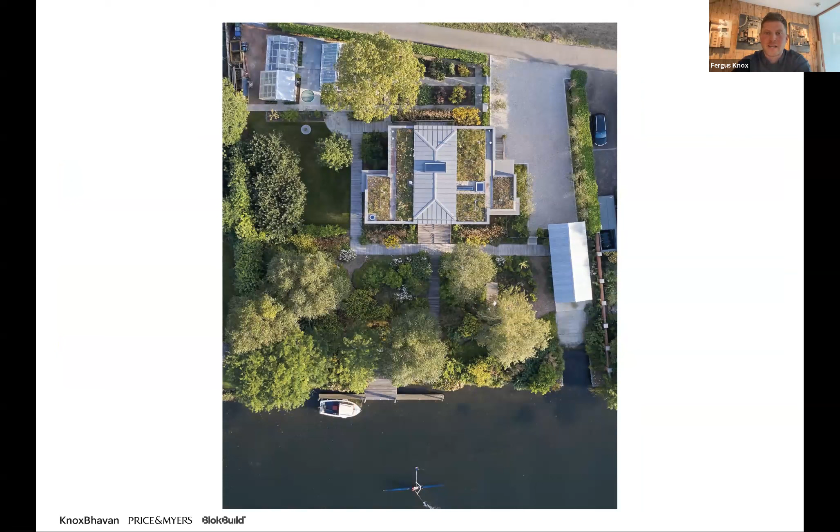Amazing. Amazing. I'm sorry, I want to become Elizabeth. If she wants to vacate that position, then yeah, I want to come and have her life.

But I just so love the attention to detail and the way you all used it to learn as you went along. So I know we've got some questions and answers coming up, but is there anything else Jonathan and Tim would like to add? Because I know architects always explain everything so beautifully, but is there anything that you think we didn't cover during the presentation? Well, I think it was covered well. I mean, there's some questions we could go through with some of the points about technical things, but that's good

presentation, Fergus. I think one thing I would just add is that it was interesting starting to use Jonathan's system on this house, and since we've done another house, but houses like this can be used as a test bed to explore a system. And Jonathan has been building his system in Bristol on some low-cost housing, and we're also talking together about other housing schemes, and a house like this enables you to explore something that otherwise perhaps wouldn't be possible.